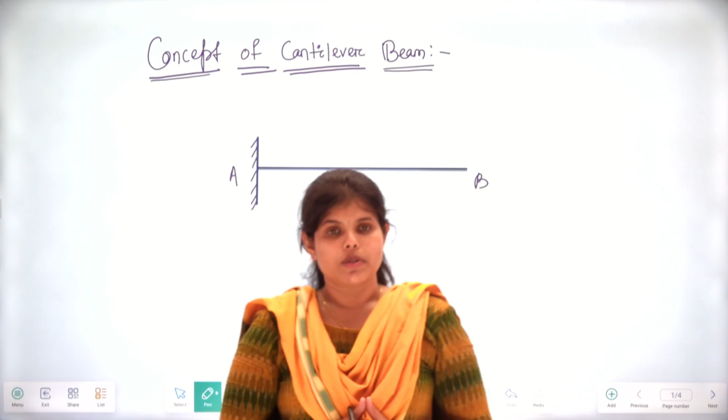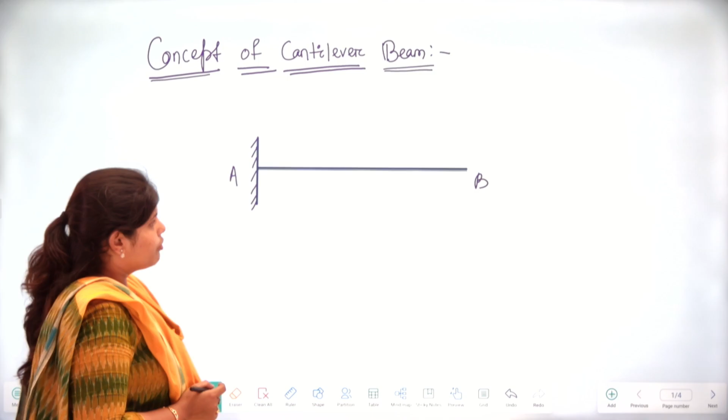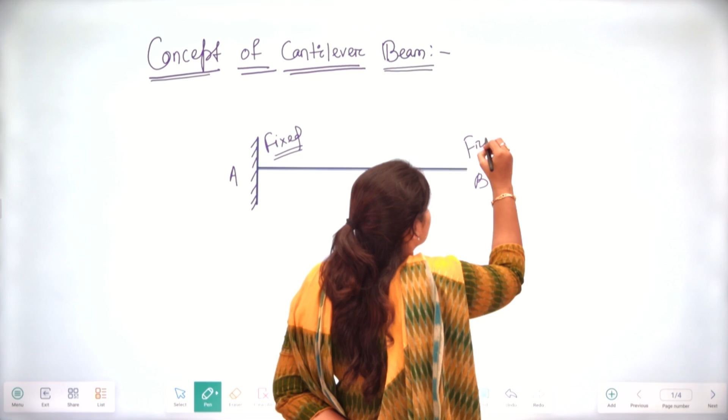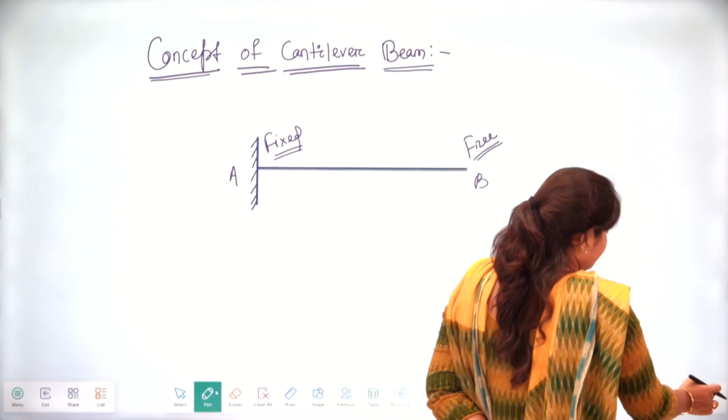In our previous classes, we discussed simply supported beam and solved lots of numericals on it. Now we will discuss cantilever beam. Here AB is your cantilever beam. In case of cantilever beam, one end is fixed and another end is free. In this class we will discuss what the SFD and BMD diagrams will look like when we apply different types of load.

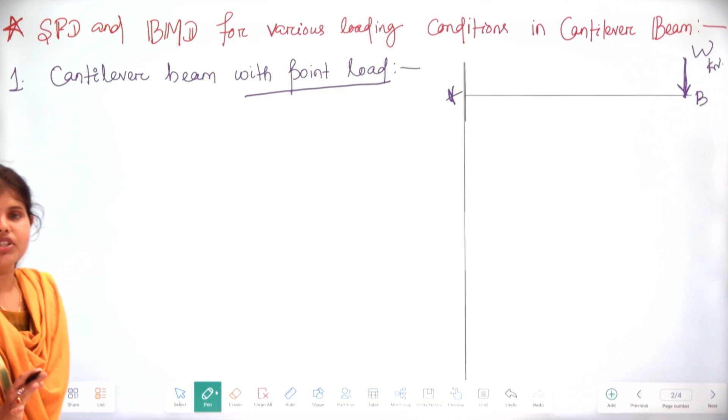First let's see if we apply one point load, at point B, that is W kilonewton. What will be the shear force diagram and bending moment diagram? Let's see.

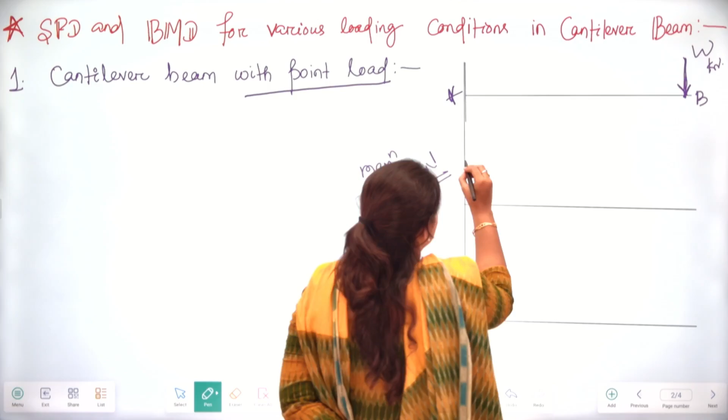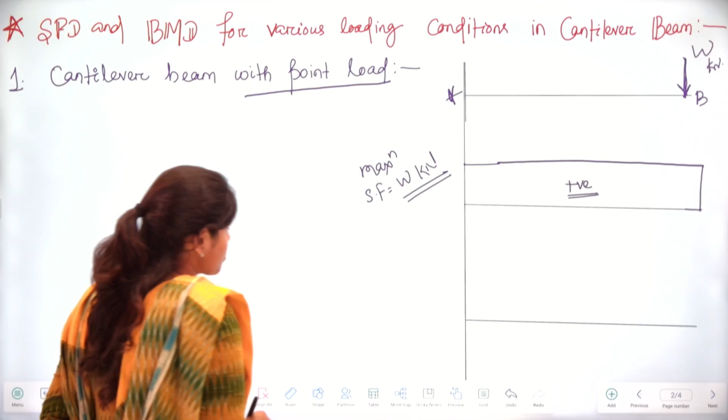Shear force is nothing but the total load, so the maximum shear force is going to be W kilonewton, and the diagram will look like this. This will be linear throughout the length and it will always be positive. So this is your SFD.

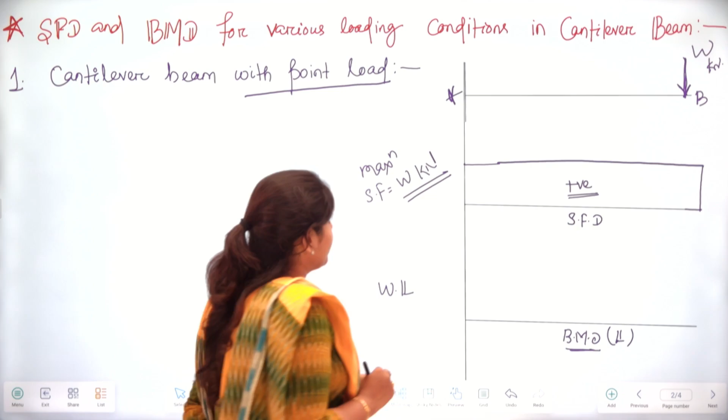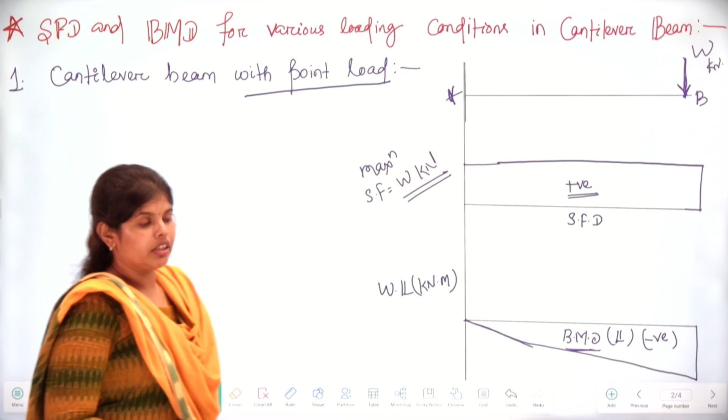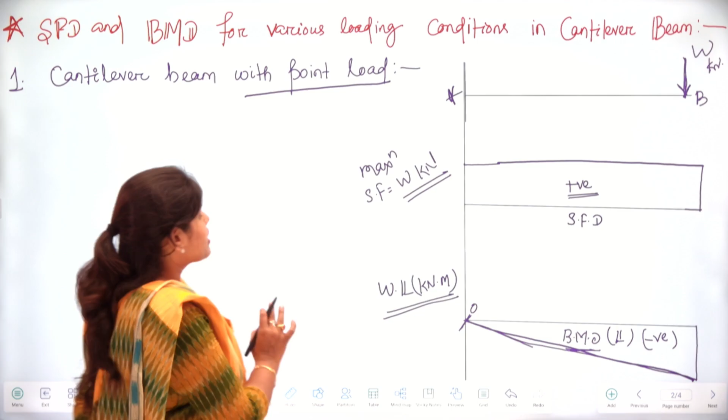Next is your BMD. BMD is also nothing but multiplication of total length L with shear force, so we get bending moment as WL kilonewton-meter. You need to remember that your bending moment diagram is always going to be negative. It will look like this, joining properly, and the maximum bending moment is WL. At the support it will be 0, so the minimum bending moment is 0 and maximum bending moment is W into L.

So this is the shear force and bending moment diagram for point load.

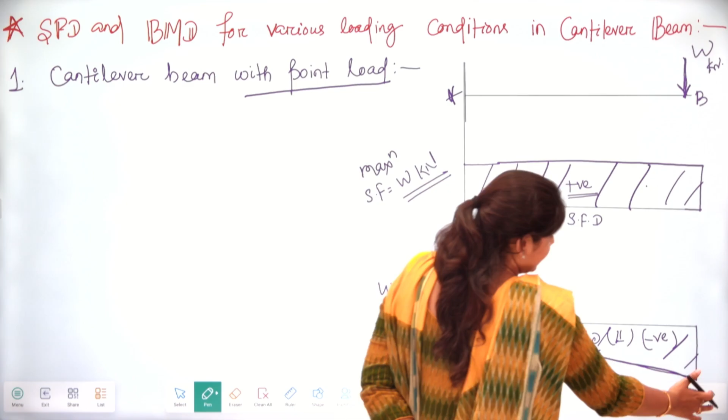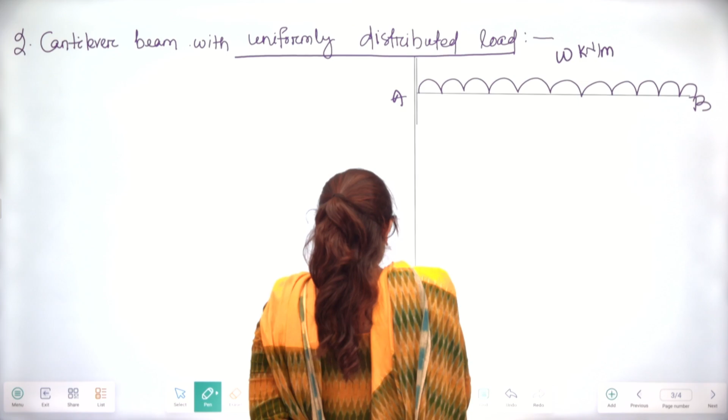Next we will see if we apply one UDL. If uniformly distributed load is applied, the structure looks like this, with W kilonewton per meter, this is point B, this is point A. The shear force diagram will look like...

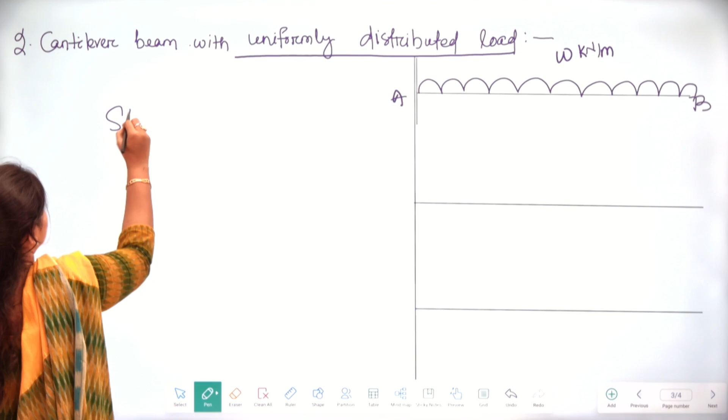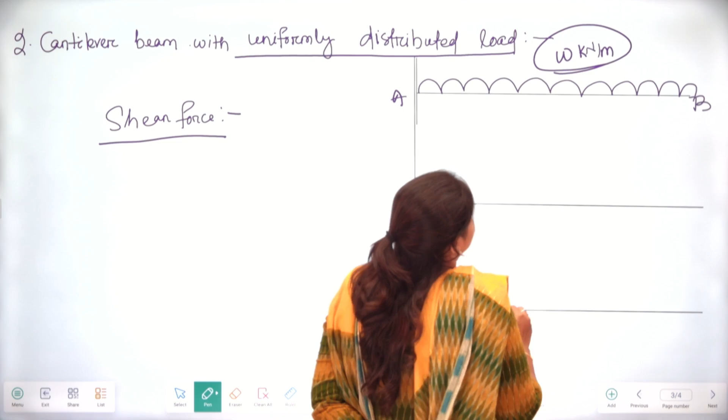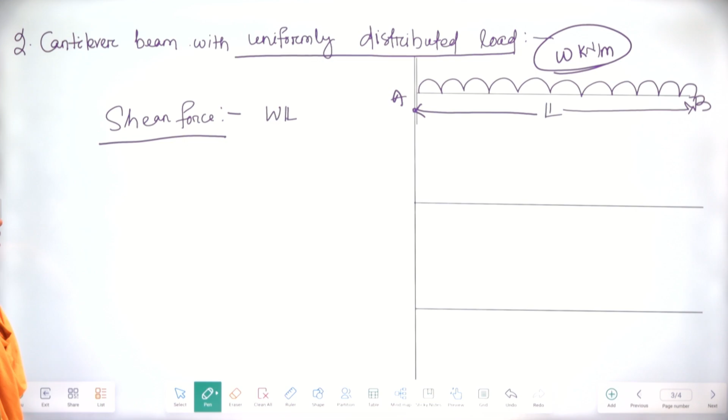First thing we know, shear force is always the load. Here the load is W kilonewton per meter, that means W into total length, so the shear force will be W into L kilonewton. This structure is also going to be positive and linear. This is your SFD.

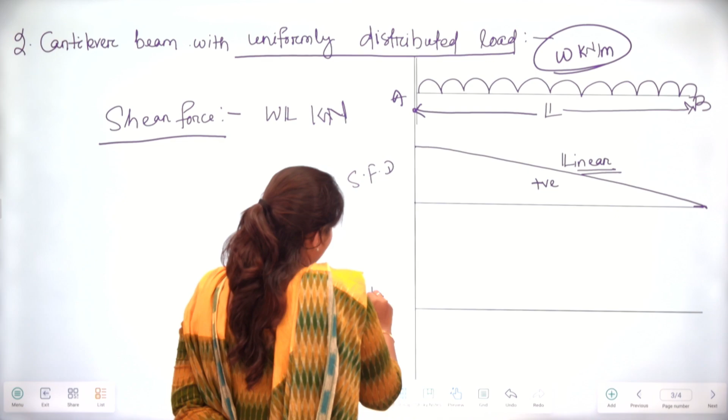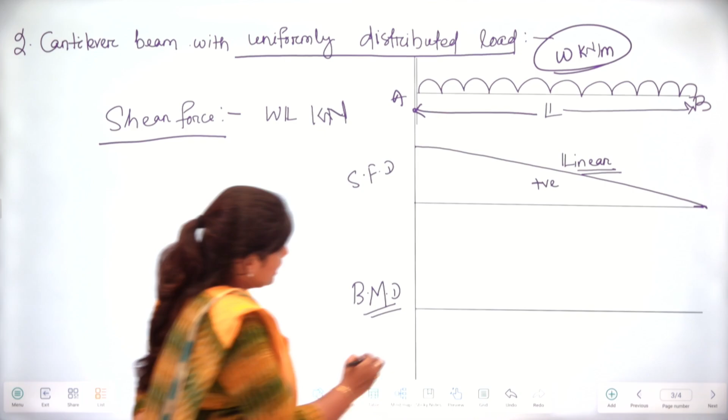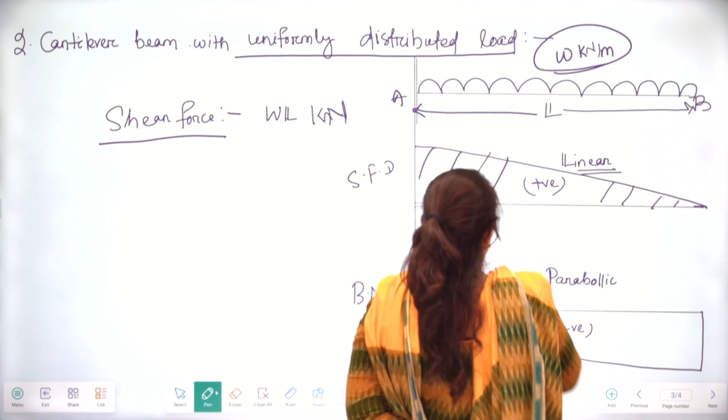To draw the bending moment diagram, BMD will be the multiplication of shear force with the distance, and it will be negative. You can remember the drawing will be parabolic. It will be negative, and it will be WL square by 2 kilonewton-meter. So the maximum bending moment is WL square by 2, and the maximum shear force will be WL kilonewton.

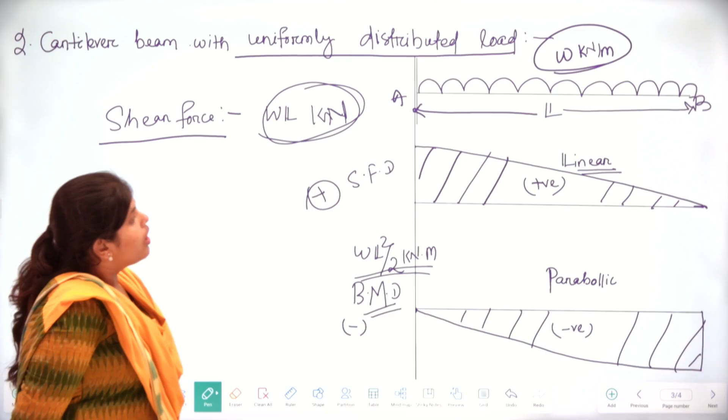Shear force is always going to be positive and bending moment is always negative. It will vary as we change left to right or right to left, but remember shear force is positive and bending moment is negative. Also remember that for UDL, the shear force structure will look linear, but the BMD will be parabolic.

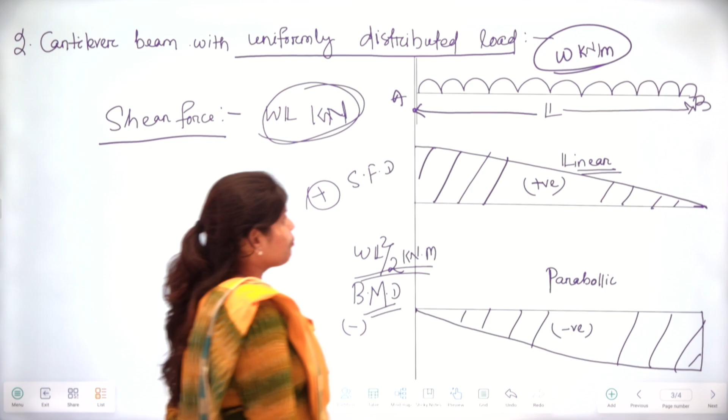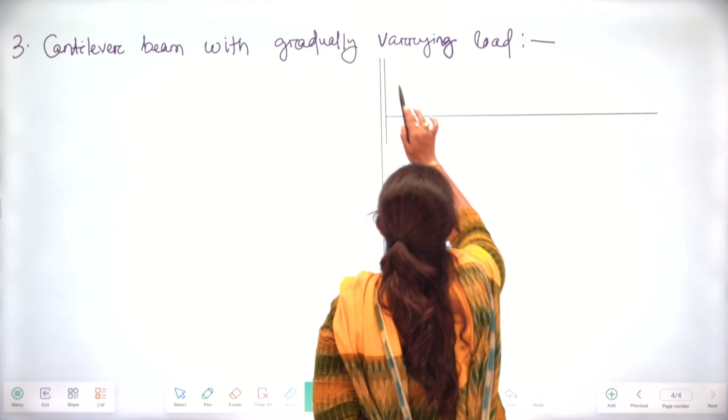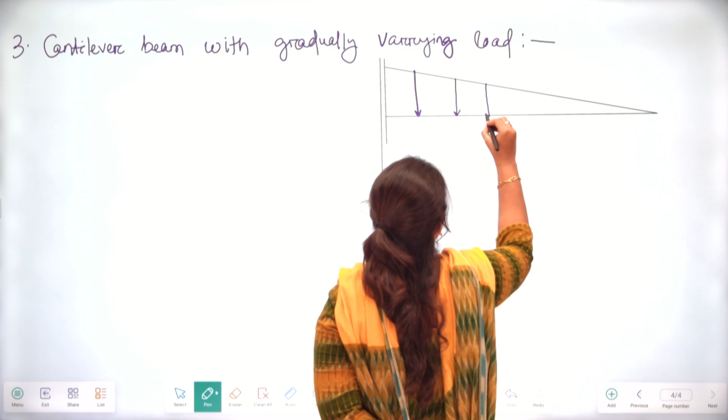Next, cantilever beam with gradually varying load. That means the load will be like this. Here it is at A, this is your B. This gradually varying load is nothing but W kilonewton per meter.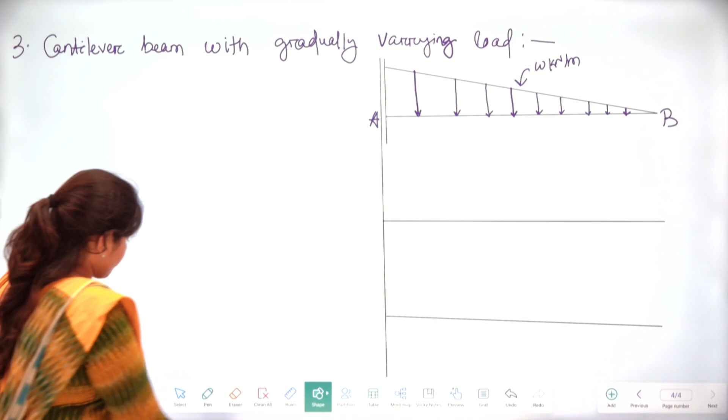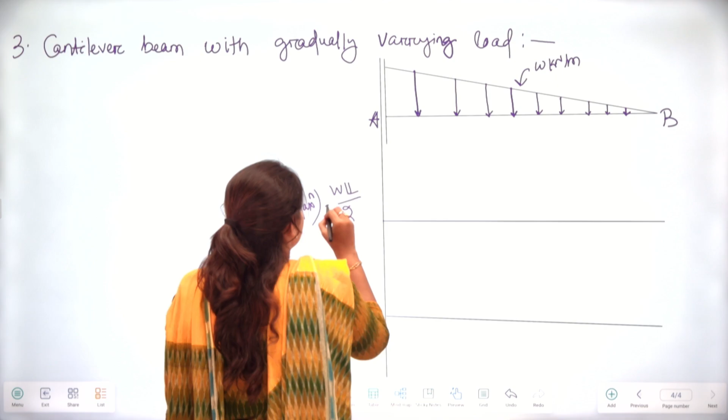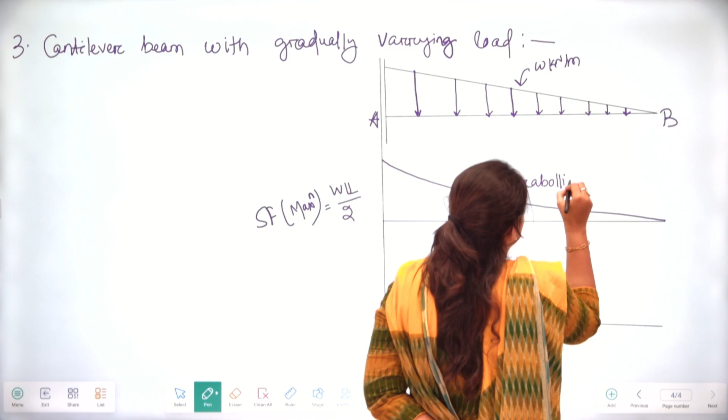If we draw the shear force diagram and bending moment diagram, first thing is, the maximum shear force will be WL by 2, and it will look like this. Your SFD will be parabolic, and you can remember that BMD is going to be cubic.

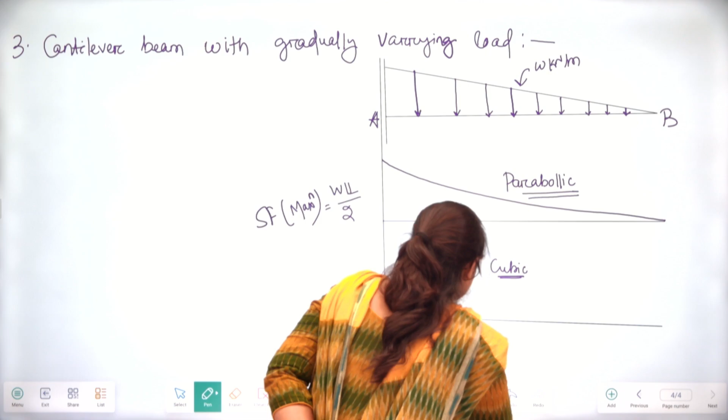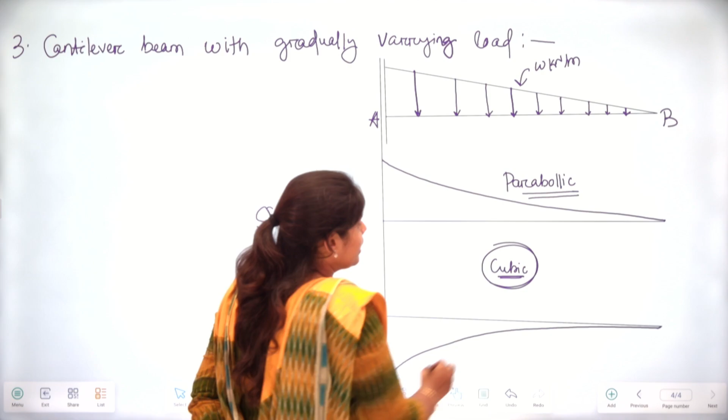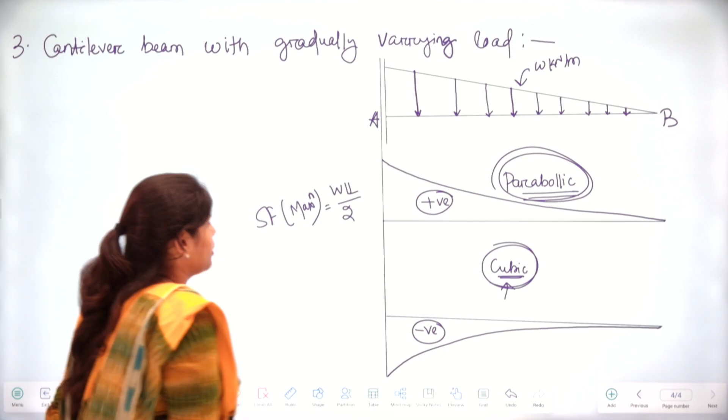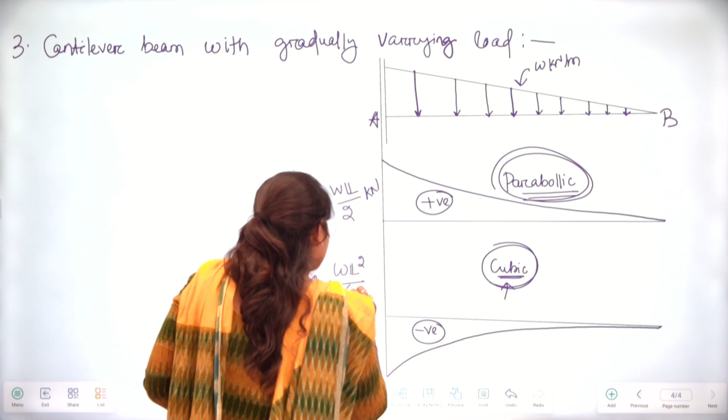This is going to be like a short-type question, how the BMD of gradually varying load will look like. It will look cubic in nature, and the shear force diagram will be parabolic in nature. Shear force will be positive and bending moment will be negative. Your maximum shear force value is WL by 2 kilonewton, and maximum bending moment will be WL square upon 6 kilonewton-meter. We need to remember these formulas.

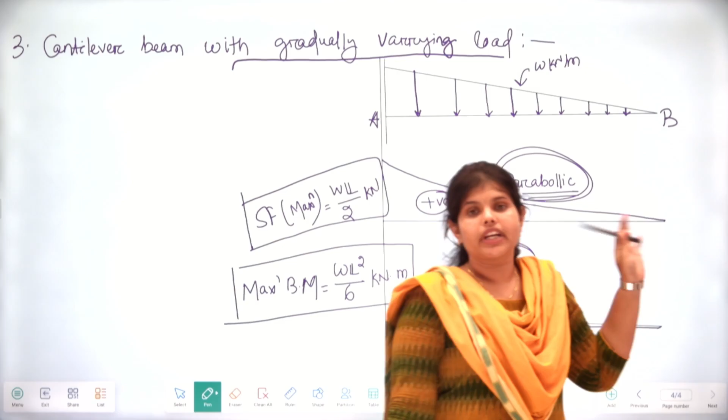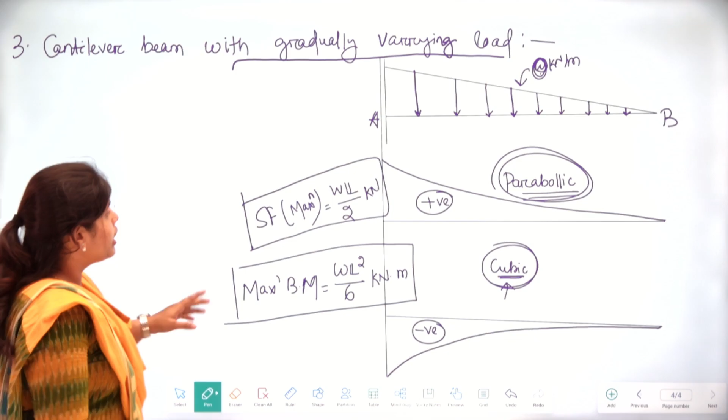Now we know the formulas for gradually varying load, uniformly distributed load, and point load. If there are different values for W and L, we can easily calculate the maximum shear force and maximum bending moment by putting the values in these formulas. So if we just remember these three formulas, it will be very easy to solve any kind of numerical in case of cantilever beam.